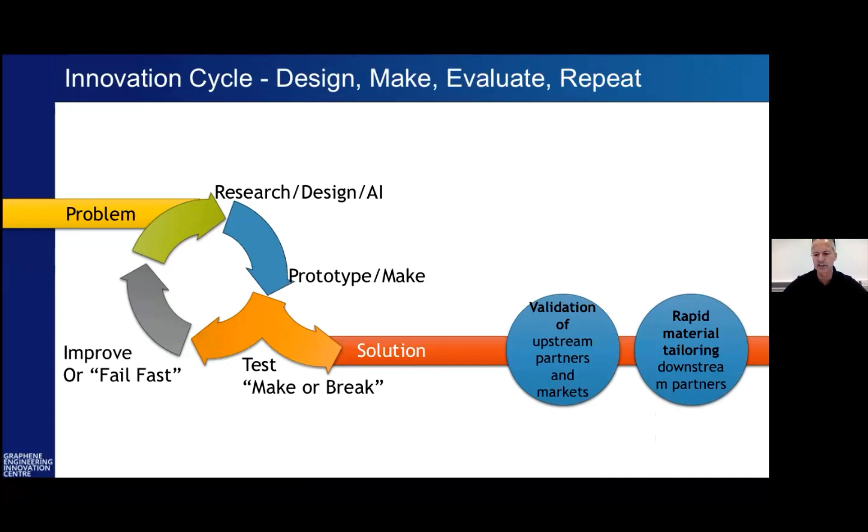But as well as the science, I talked about the business model. For me, we also needed to develop a much more rapid, a much more innovative way of innovation between academia and industry in the creation of supply chain. But how do we turn the innovation cycle that traditionally takes months and years into one that can be measured in days or weeks? And our response to that in Manchester was through the creation of the Graphene Engineering Innovation Centre in partnership with Masdar out of Abu Dhabi, but with UK and European funding. We created the GEIC. And the GEIC is very much around that translation of the science into products and applications through the so-called Valley of Death.

And those who have seen my presentations in the past will have seen me talk around the Manchester model, where on the x-axis we talk around TRL or technology readiness level, and on the y-axis we talk about system readiness level. And the journey, if you like, from bottom left of this chart through to top right, from the science through to products and application. And there's a general scheme how universities typically operate bottom left. The National Graphene Institute has started to push that along the TRL, but address things like standards, toxicology, yield, process, etc. The GEIC is around the Valley of Death, but for me, it's about that engagement model between academia, supply chain, and industry that's absolutely key.

A key part of this chart is sort of in the middle, along the right, around what we call technology capability demonstration programs. And one of the things I want to get across today is, as well as the science and as well as the need for testing, for validation, for doing the engineering activity, there's a real role to play of producing large-scale demonstrators that sit alongside some of the development of product to become, if you like, a living test lab. So in my background of BAE Systems, which is a defense aerospace company, it often involved designing, for example, a small drone or an unmanned vehicle that we could use as a platform for testing new technologies.

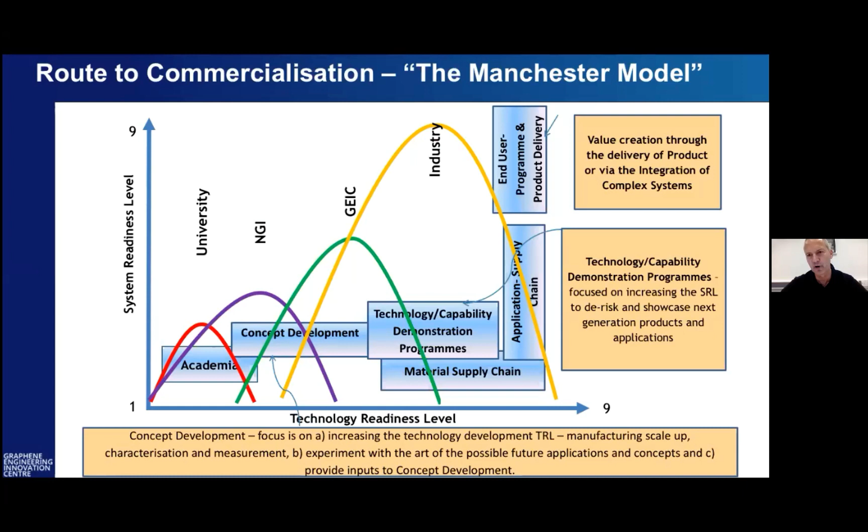Why on an unmanned vehicle? Without a pilot, we reduce the risk, but it's enabled you to get real data from a flight of sensors, of materials, of propulsion systems in a real-time environment that can reduce the risk from taking that technology from the bottom left of this graph into the top right of products and applications. So again, as a real sort of case study, I would like to give you an example where we can create living labs that create data that reduce risk, that accelerate our product into the marketplace.

So what I really want to focus this presentation on is just one case study around construction. When we look about the drive to sustainability, we could look at aerospace in terms of lightweighting, in terms of alternative propulsion, in terms of multifunctionality. So can we get the wing of my aircraft as well as being structurally strong? Could we also do de-icing, lightning strike protection, as well as energy storage? So there are many case studies of graphene and 2D materials that could play into aerospace, could play into automotive, could play into the energy market, new forms of batteries, supercapacitors.

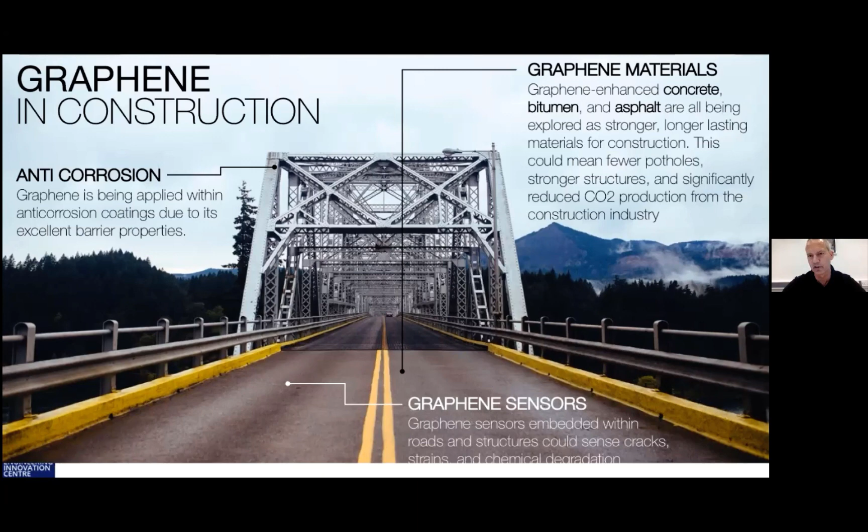But I'm going to really focus a little bit around construction, and in particular around an opportunity around concrete. But this could be around bitumen or asphalt for roads. It could be around anti-corrosion properties to extend the life of crash barriers or of steel structures, through to smart infrastructure of the future or smart highways as we go forward.

So one of the partnerships I'd like to talk about is a partnership we have in Manchester with an organisation called Nationwide Engineering. Nationwide Engineering, the relationship started 2 years ago. It was a conversation between myself and some of the founders of Nationwide, two alumni from the University of Manchester, around the challenges or drives they were seeing in their marketplace, both around innovation, but more importantly, around the need to address sustainability.

If concrete was a nation, you would see that the emission of CO2 is more than most states. I think 10% of the world's emissions of CO2 are linked to concrete and concrete production and manufacture. So if we could reduce the amount of concrete, that would have a significant impact on the reduction in CO2 and the drive towards sustainability.

So we started off with a vision of a stronger, cheaper, greener concrete. And this is a brief summary of some of the activity that we've undertaken with these partners Nationwide over the last 6 to 12 months.

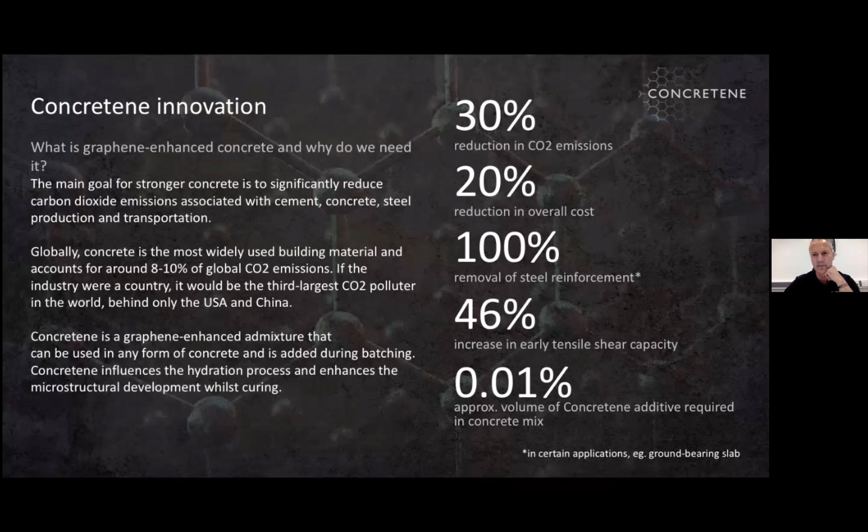And that's the other key part of this activity: there is no new training, there is no new equipment, there is no new staff or activity required. The graphene mix is added as an additive into the batching plant. It turns up in a cement mixer and you pour it in the traditional way that you've always produced cement.

So for me, there are some real benefits and improvements for what we're doing through these various pours, as well as getting real data. We have a living lab, so the lab outside the GEIC that we poured two weeks ago, we're doing measurements every day, every week, over the next period. And to give you an example of some of the fringe benefits, we actually achieved greater than the design performance of 28 days within 12 hours of the initial pour.

Now, if we can translate that into something practical, it means you don't need as long on site to lay your concrete, and you can continue with your follow-on operations in a much shorter time. So when you look at the broader sustainability agenda, it's not just a reduction in concrete, it's a reduction in lorries to the site, a reduction in footprint, a reduction in the overall time and risk on a building site. So that translates into further benefits that we're still evaluating, costing, and understanding.

So as a simple statement, what you can see through the work we're doing on what we call Concretene with Nationwide Engineering is improvements on strength, durability, and tensile. But we're also seeing some other benefits that, if we can optimize, again, we haven't done the work on this yet, but there's real opportunity. There could be work around porosity. We've seen so far very few cracks, which has a benefit for certain applications, and also improvement around things like permeability, where there are products on the marketplace, but they're not always the most environmentally sustainable products in the future.

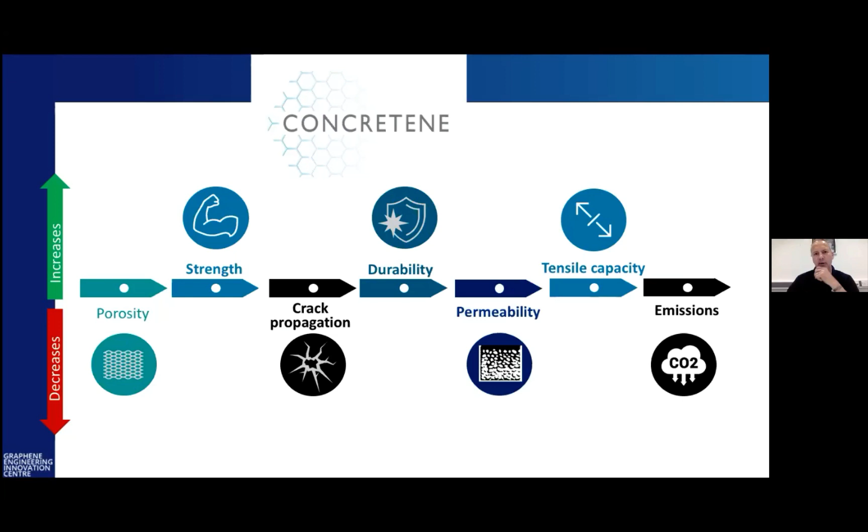Key one for me, though, is a reduction in CO2, and we're still doing the calculations, but already we're seeing significant reduction opportunities, both real and potential, for applying 2D materials into construction in the future. And it's not just concrete, it's everything from concrete to coatings to structures going forward. And key to this partnership is our work with Nationwide, but we're working with the broader University of Manchester, as well as funders from Innovate UK and the European Union, who have supported the various programs that we're running today.

I've talked a lot about concrete as a case study. I could have equally talked about case studies around automotive or aerospace and lightweighting. I could have talked around recycling. There are great examples of rubber mats, where we're taking recycled rubber crumb, and through the addition of graphene, we can get a recycled product that is reusable without the performance challenges you normally get from recycled rubber crumb. Just to quote one stat, one of our partners has done a rubber mat that's a third thinner than a traditional recycled rubber mat, but five times more durable. That translates into potential lower cost, longer life, and at end of life, you can chop it up and recycle it again.

So the through-life cost and recyclability are increasingly becoming a driver when we look at some of these products in the future. And through the addition of 2D materials, we seem to be able to use recycled materials without the traditional compromise of a loss of performance. That's an area of great interest that we're working on with a number of partners.

So that's the end of my presentation. We like to use this term Graphene City. For me, graphene is in a very exciting stage. Sustainability is really driving a lot of the dialogue we're having with industrial partners today. It's a catalyst that enables the engagement. But if we can deliver solutions at lower cost and higher performance, both in manufacturing costs and through-life costs and performance, then immediately that becomes very attractive for industry to engage. If we can continue this journey, we're at a very exciting stage. But if we're going to meet the targets around sustainability, we can't afford to hesitate. We need to continue. We need to move.

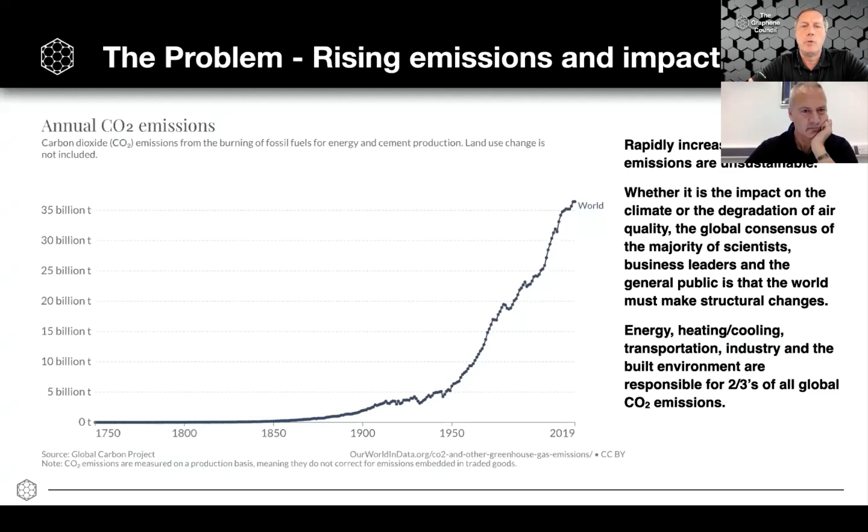So what is the major problem that we're trying to address with today's conversation? Well, it's crystal clear that ever since the end of the Second World War, from about 1950 until today, there has been a dramatic increase in CO2 emissions. And whether you believe that CO2 man-made emissions are affecting the environment or not, the truth is right now that governments, the populace in general, and businesses have all decided that decarbonization of the economy and all of the impacts on reducing CO2 emissions is where we are headed. I think that's an important distinction to make.

The challenge now is, how do we actually get there? How do we get to this net zero target from where we are today? And today's materials, which have been maximized and optimized to about as far as they can go, are not going to get us to net zero. What we need and what we see happening is this revolution in advanced 2D materials. They're called advanced materials because they have substantially improved performance characteristics compared to legacy materials.

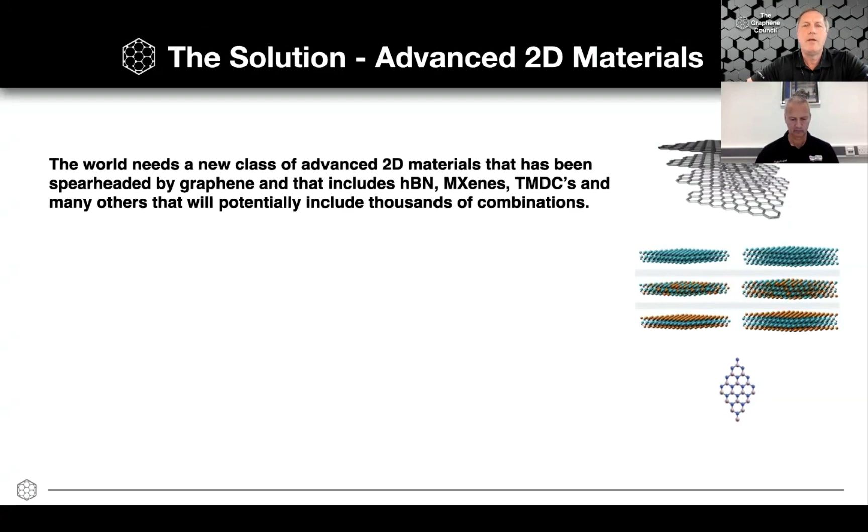There are phenomena that happen at the atomic level that make these materials, including graphene, which is pure carbon, behave in ways that the macro form of these materials do not behave, and they can enhance the performance of other materials, making them stronger, lighter, more electrically conductive, better sensors, better heat transfer properties, and many, many other attributes. And so this new class of materials is important not just to improve what we're doing today.

And the example with concrete is a fantastic example. Here we take a material that's been around literally for centuries and get it to perform at a level that we haven't been able to, despite many decades of intense R&D and optimization of concrete and cement materials. Graphene comes along, and at less than 0.1% by weight, we get dramatic improvements. That's an example of the capability of these new engineered nanomaterials.

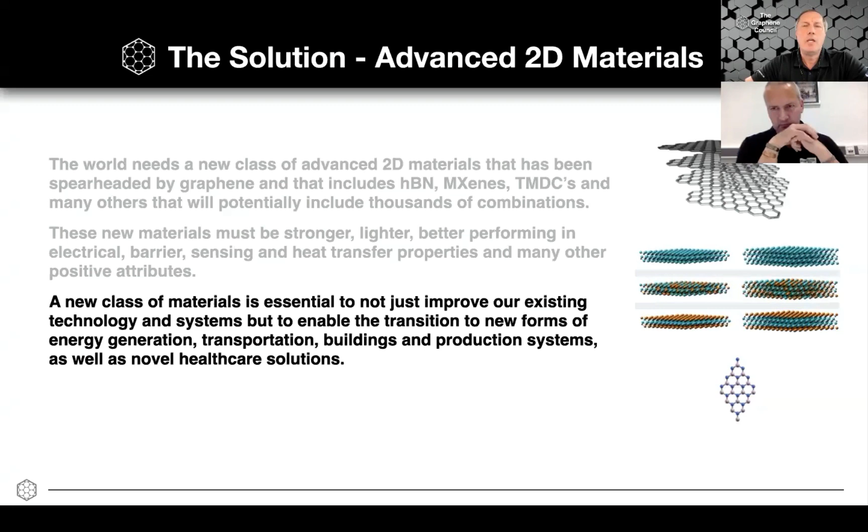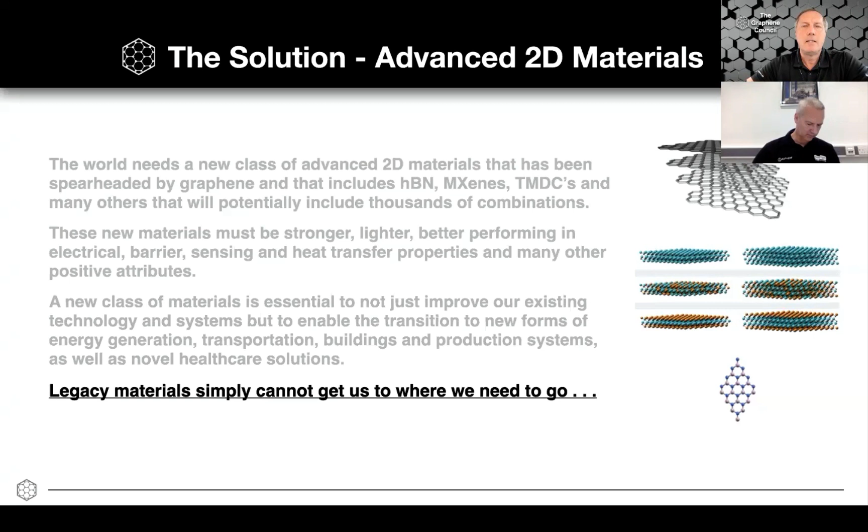So the message here is simply this: if we really are serious about getting to net zero in our economy, business, and in our environment, legacy materials will not get us there. We need to use new advanced materials that have substantially improved performance to help advance towards that goal. That's what we're talking about today.

So what is the role that graphene has to play in this? So I'll give you just a couple of examples, and there's a lot of really good science behind this and real life demonstration, but I just want to give a high-level overview of what we're talking about.

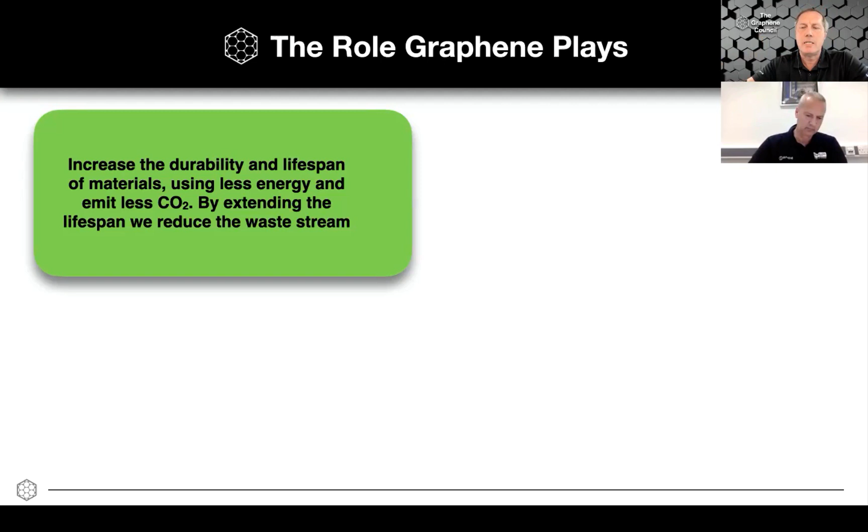Adding graphene to a material, making it more durable and longer lasting, will emit less CO2 simply because we're not putting it into a waste stream, we're not incinerating it, or you're not replacing it as frequently. That's one example. The CO2 reduction for reducing cement content in concrete is a really good example, but there's also asphalt.

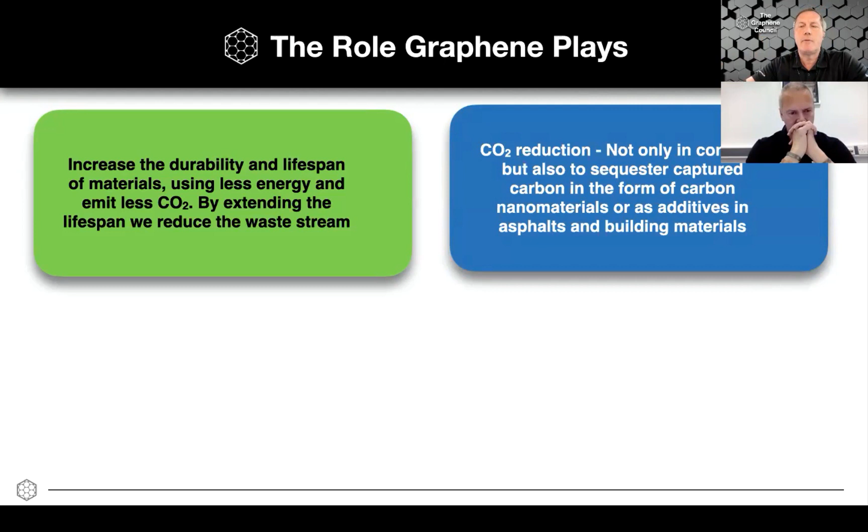So bitumen and asphalt for roadways, making them last longer so they don't have to be repaired as often and making it more durable, or the ability to simply use less material to achieve the same objective, all helps us to reduce that CO2 footprint.

The recyclability of materials. So for example, I'm going to call out a couple of our companies, but we have dozens and dozens of companies that are capable to help with these solutions. But for example, NanoXplore, one of our companies that produces graphene, has demonstrated the ability to add graphene to plastics that were at such a degraded point that they weren't able to be recycled as is. But by adding graphene and improving the performance of that recycled material, you could divert material from a waste stream into a recycled product, extending the life and again, reducing the CO2 imprint from that material.

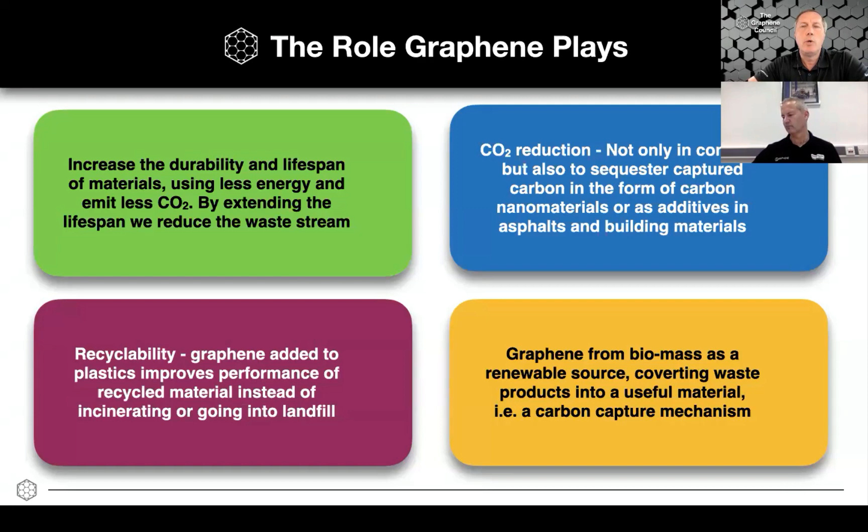Graphene from biomass is another way of producing graphene. So the exciting thing with graphene material, because it's a pure carbon material, there are multiple ways of making it. Typically from graphite, which is exfoliated into the nanoparticles, but it can also be made from other carbon sources. And almost every day we hear about another way of making graphene, including from renewable sources or diverting, for example, waste gases like methane and converting them not only into graphene, but also separating hydrogen, which is important for a zero emission economy.

That's another example. To go further, electric vehicles and the electrification of the transportation system is a positive step, but it comes with another trade-off, and that is that existing tires and rubber technology is not suited to deal with the heavier weight of these vehicles. They're therefore increasing the wear on the tires. And so what do we need? We need tires that can maintain the grip and the traction that we need for safety, but also can wear longer. And graphene, again, at a very small percentage added to these elastomers, can improve the performance of tires, making them longer lasting without having to sacrifice traction.

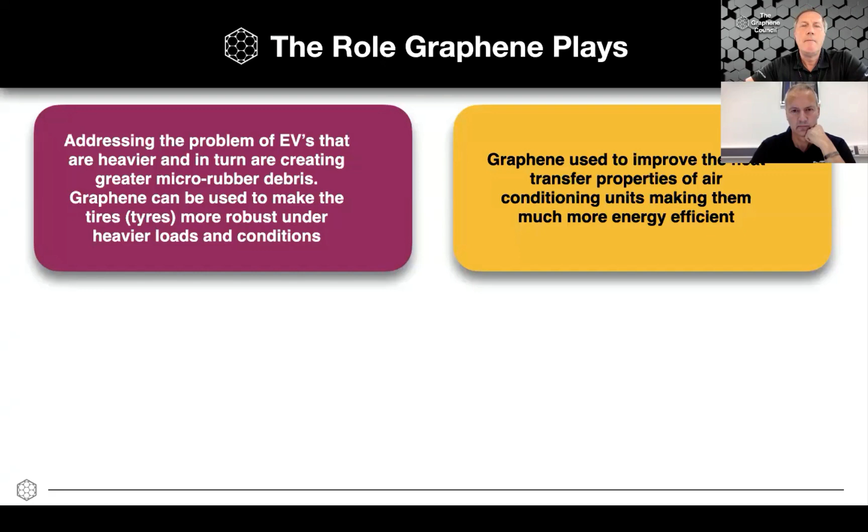Another example is in heat transfer, and I'll call out another company, GMG, which has demonstrated adding a graphene coating to existing air conditioning units, improving the heat transfer properties, making them much more efficient, means less energy is used because we're going to continue to use air conditioning in our built environments. And so it's really important that we have a reduction in the energy needed to continue to treat that air.

Another example is using graphene membranes for water treatment, whether it be for wastewater treatment or for desalination. Membranes that, because they're so much thinner, require less energy to treat that water, whether it's desalination or for waste treatment, which means less energy use and also less biofouling, which means that they last longer without having to be replaced, and that reduces the downtime for those facilities for management.

And another really important area with the electrification of the transportation network, as well as the move to sustainable energy through wind and solar power, requires large energy storage capacity. So for example, for energy generation from wind, solar, or hydro, that energy needs to be stored so it can be used when it's needed. Often that's not the same time when it's generated. That requires massive energy storage and a new generation of batteries, as well as for electrification of transportation like EVs.

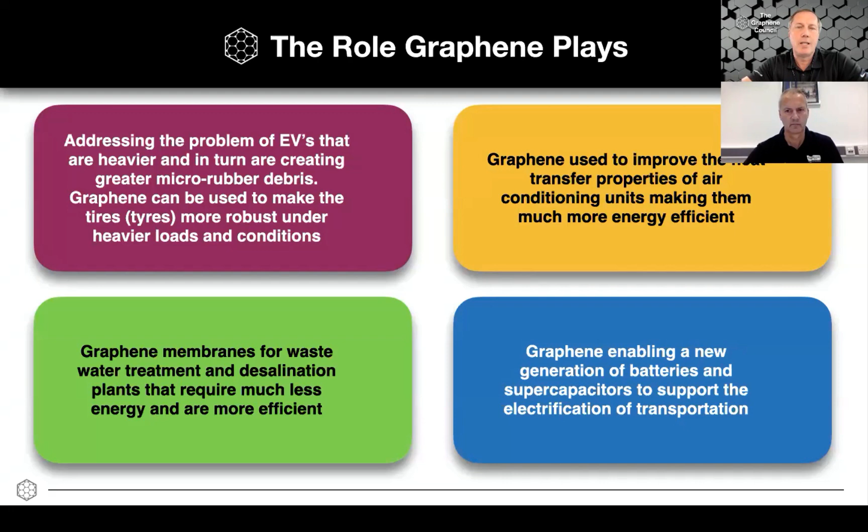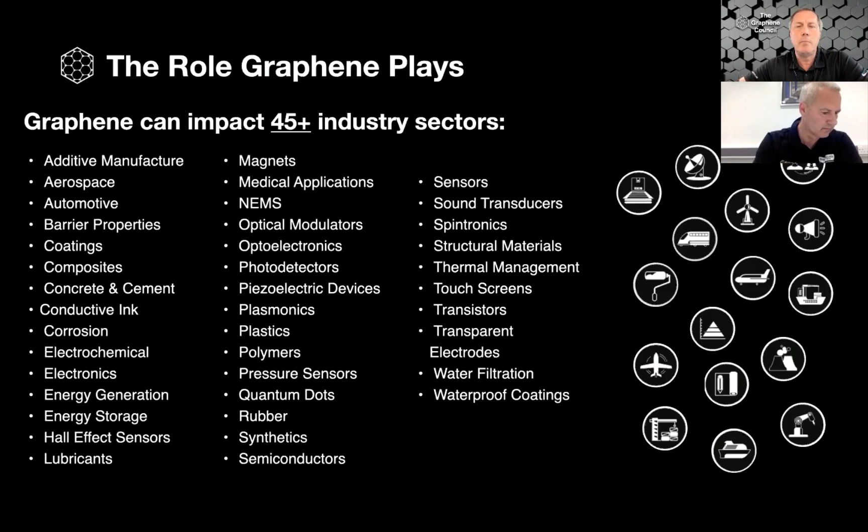And so whatever sector you might happen to be in, and we have representation in our audience, we know, from many, many different sectors, chances are extremely good that graphene has applicability for your sector to not only reduce the CO2 footprint, but as James really well laid out in his presentation, that we can actually improve performance at the same time. And because so little of graphene is needed to have these massive improvements, even if it's viewed as a quote unquote expensive material, you really have to look at what is the total value of improving the performance, reducing CO2 emissions, having better performing and longer lasting materials, then the trade-off for cost, often it's an advantage. It doesn't necessarily mean that it has to be more expensive.

I do want to point out that we have a close partnership and relationship with the University of Manchester and the Graphene Engineering Innovation Center, and that there's a special partnership available for Graphene Council member organizations to access the resources at this facility under special member-only conditions through the Graphene Council. And what does that mean? The facilities are quite impressive for rapid prototyping, and that's what we're really talking about today, is going from considering graphene and thinking about it and maybe looking at it theoretically and actually getting this now into products, because it is proven to work in many of these applications.

We have quite a number of companies that have scaled production, and we are going to need, for example, just in the cement application, if graphene is used in 0.1% of all of the concrete used on the planet on a yearly basis, that translates into over 100,000 metric tons of graphene required, even at that very low loading factor.

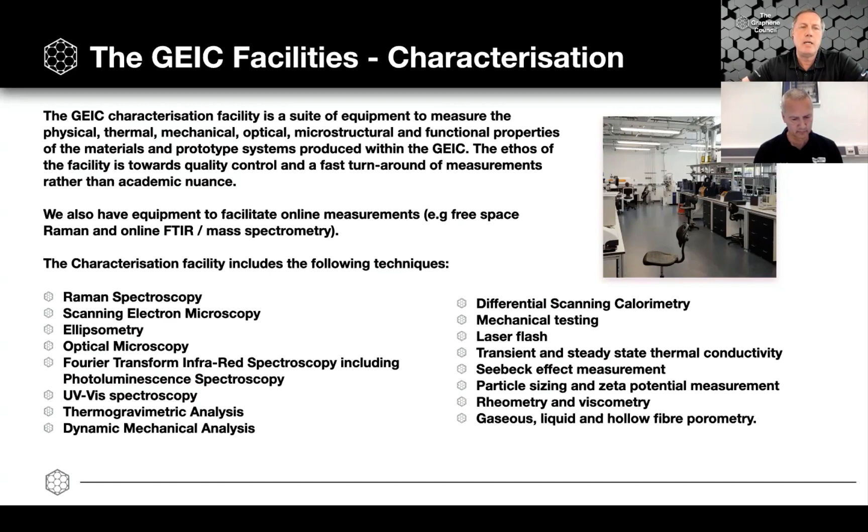And what's important for end users to know is that there are a number of really good quality graphene companies that have ramped their production facilities and are anticipating the demand that we know will come. It's just a matter of when. And we think that time is now. And the facility at the University of Manchester and at the GEIC is there to help to do rapid prototyping and application testing of the materials.

And this also includes access to the National Graphene Institute, as well as the Henry Royce Institute for Advanced Materials, which means the network of facilities that are available and the equipment that's available to do the prototyping and testing extends throughout the United Kingdom, again, in partnership with the Graphene Council, if you choose to go that route.

And as a last bit of information for our audience, for those who are maybe not as familiar with the Graphene Council as some of our members are, the Graphene Council does provide specialist advisory services to help you take a product from concept through to completion and to develop products, putting you in partnership with qualified graphene producers and application development partners.